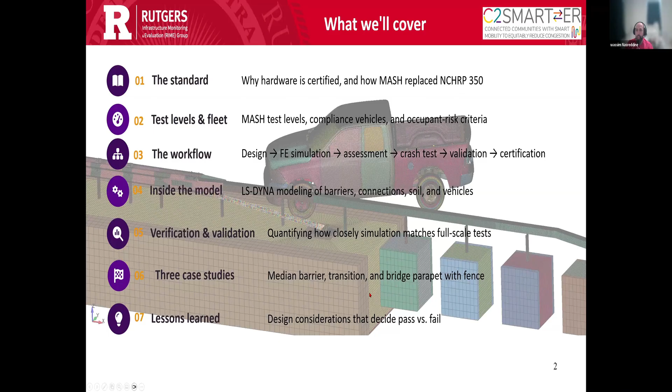Okay, so first we're going to talk about barriers, because mainly when we talk about hardware, the safety hardware we are trying to assess includes mainly the barriers. Now, of course, there are many types of barriers. We have guardrails or guide rails, as we call them. We have median barriers, bridge parapets, and transitions.

And barriers can be either concrete or steel. They can be cable barriers. There are several types of barriers. And the main role of the barrier, as everybody knows, is to contain and safely redirect an errant vehicle, of course, without excessive occupant risk, a structural breach, or debris hazard.

Full-scale crash tests are the benchmark, but of course they are expensive, and it's very hard to replicate them or do them over and over. A crash almost always lasts less than one second, but we have to understand what happens in each and every millisecond, because the damage that occurs, the snagging that might happen, the occupant risk that happens to the passengers, they all happen within those milliseconds.

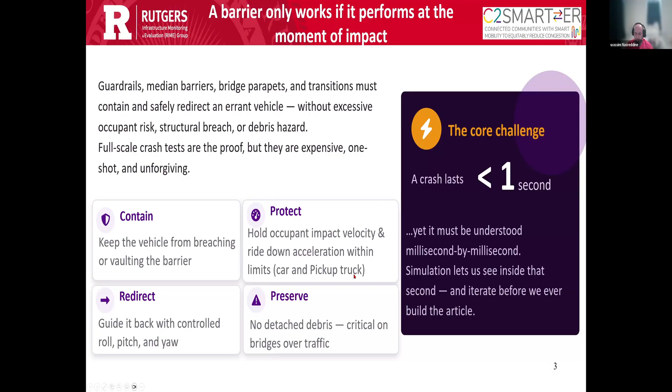So this is about the barriers that we mainly assessed in this project. We have several types. The guardrail or guide rail that you see usually on the roadside, and it's only from one side. The median barrier is what separates traffic from both sides, and it's symmetric, so whether it's impacted from the departure or approach side, it would behave the same.

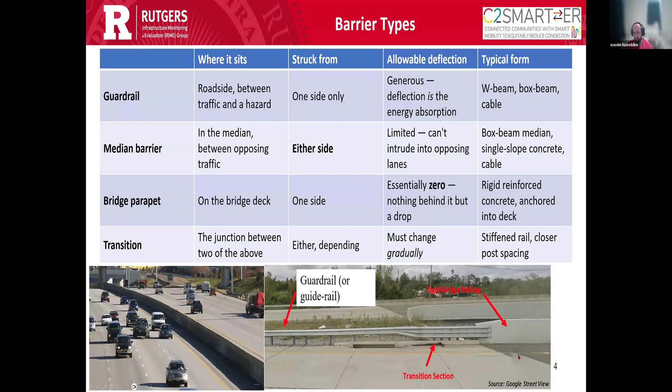We have the bridge parapet, and these are usually more rigid because we don't have margin for deformation as in a roadside barrier. And we have the transition. The transition is the junction between two barriers, usually the bridge barrier and the roadside barrier, and as its name suggests, it makes a transition in the stiffness or rigidity from a less rigid barrier, which is the guide rail, to a more rigid barrier, which is the bridge rail.

Okay, so the standards for assessing roadside barriers. Previously, it was NCHRP Report 350. That was the first standard published, and before that, every test facility had their own criteria. Since 1993, NCHRP was the benchmark for assessing the safety of roadside barriers.

Then it was replaced by MASH in 2009, where the first edition was published by AASHTO, and another edition replaced it in 2016. Now new installations, and even all existing installations, are being reassessed according to MASH criteria.

Now, what does MASH criteria look at? It looks at several things, but mainly the structural adequacy of the barrier, or any roadside hardware, but mainly we're talking here about barriers. So barriers are supposed to contain the vehicle and redirect it, and the main connections have to stay intact, anchors or splices or whatever.

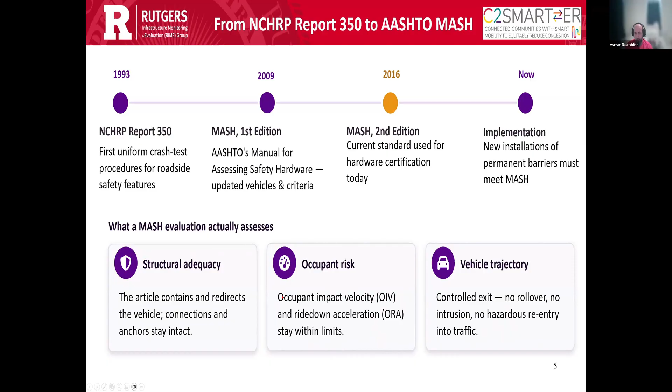Okay, so there are several test levels for barriers. As we know, barriers are not equal. There are some barriers which you see on the highway, some others on local roads, and each barrier has been assessed at a certain level. So we have test levels 1 through 6. At level 1, we have the low speed barriers, and these are the smaller barriers, and they are supposed to redirect traffic at 31 miles per hour. Test level 2, these are barriers used on local roads, and they are tested at 44 mile per hour.

Then test level 3, that's the most common, used for highways, where the barrier is assessed based on an impact at 62 miles per hour with a car and a pickup truck. Test level 4 adds, to test level 3, a 10-ton, or 22,000 pound, single unit truck at 56 mile per hour. Then we have test levels 5 and 6, which add a tractor trailer and a tanker trailer.

Now the small passenger car, otherwise referred to as 1100C -- that's its weight in kilograms, so 1100 kilograms -- and this is its weight in pounds. The impact is optimized to be at a 25 degree angle. For the pickup truck, which weighs around 5,000 pounds, also at 25 degrees with the same speed.

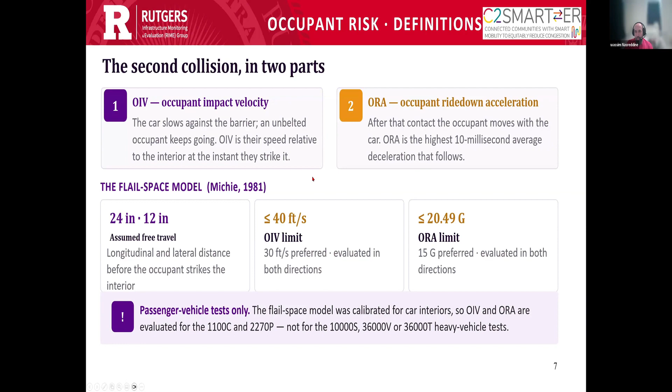Another component that we look at is the occupant compartment deformation. So aside from the velocity and the acceleration during and after impact, we look at the deformation of some components of the car.

Mainly, we have the floor pan, the door, the top part, the toe pan, the roof, the windshield, everything. But almost always the governing compartment would be the floor pan and the door because of their close proximity to the wheel.

So why is this dangerous? Because any excessive deformation would result in injuring the passenger or even the driver, depending on the side of the impact. And there are limits set based on the compartment. The floor pan's limit is 12 inches. The door limit is 9 inches. And if the occupant compartment deformation exceeds that, that would be considered a failure.

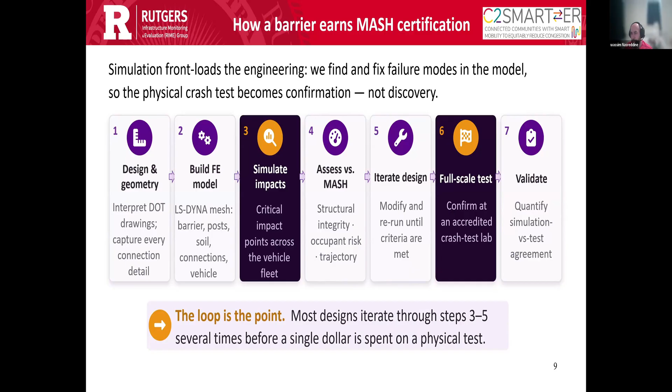And then after everything is prepared, we go and do the full scale test, and then we go back to our model and see how it compares to the full scale test.

As I mentioned, we use LS-DYNA to do the simulation, and LS-DYNA does the equations of motion with explicit central difference time integration, which is the right tool for a short contact-rich event. We have large deformations, buckling and fracture, and thousands of interactions. All the parts interact together, and they mostly undergo nonlinear deformations and reach their nonlinear zone.

We do that for a full test that lasts for 1 second, the whole impact. Because we're doing explicit time integration, we have to do it at very small time steps, because otherwise we would risk the instability of the model, and then it stops. For our case, it's 5 microseconds of time step, so we will be looking at the whole model every 5 microseconds.

So for a full test, we have 200,000 steps, and at every step, the software undergoes a whole lot of mathematical computations, because as mentioned we have millions of elements. They're mostly nonlinear and contact driven.

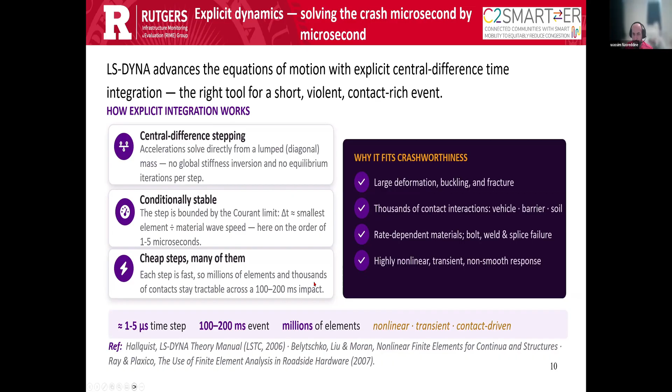To be able to run these huge models, we use our cluster at Rutgers, which is a series of very high-end computers. We do distributed memory, where we can run up to 280 CPUs for every case, and if we go up to 280, we can finish the model in 1 day. Otherwise, if you use less than that, it can go up to 4 days just for one case.

And remember how many cases we have, how many impact points, how many test vehicles we have to use. So it requires a lot of time.

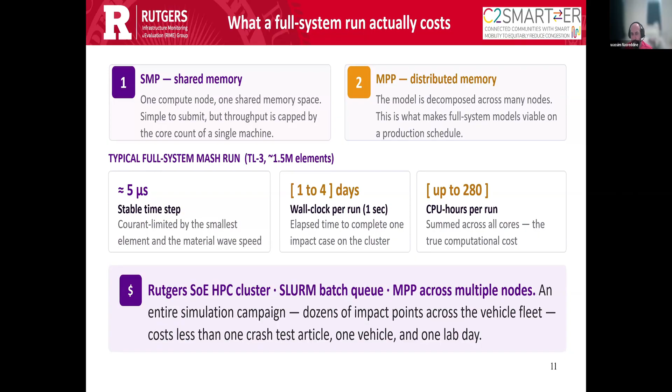As for the modeling, every structural component is modeled and meshed appropriately, so if we use a very small mesh, we increase the runtime, and if we use a larger mesh, then we have to reduce the time step, so that doesn't help us. So all of that is optimized.

Of course, concrete elements are modeled as solid elements, so are bolts as beam elements, but the heads and the nuts and all of that are also solid elements. Soil elements are solid elements. Rails and posts, steel rails, are modeled as shell elements with 5 integration points to capture the deformation. And all of these elements were calibrated and tested by different facilities.

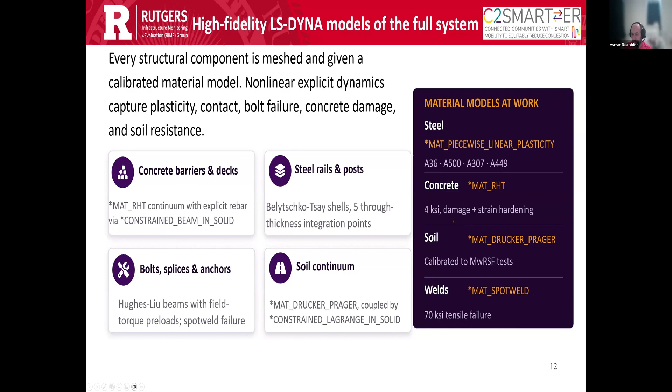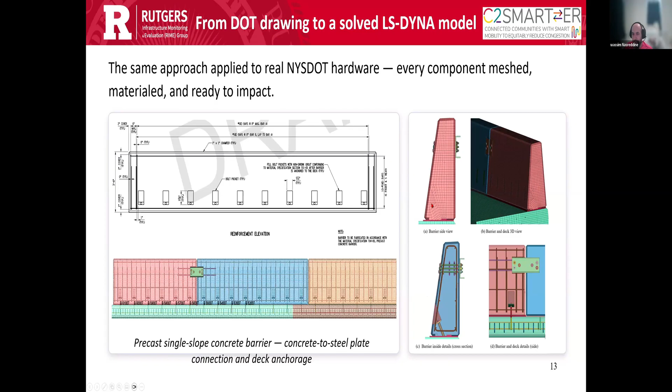So we have the barriers connected. You can see the mesh here for the concrete barrier, and we have a steel anchor going through the deck, and we have the deck reinforcement and the barrier reinforcement here, and a connection plate. So there are a lot of details to pay attention to.

And this is another article that was also tested a month before that included a concrete parapet with a fence, and the fence required a lot of elements to capture. Now that's something we spent a lot of time to optimize because we had almost a million beam elements for the fence, and you can tell how many contact interactions are there.

So that also required we had to reduce the time step because we got some non-physical added mass, and that resulted in termination of the model. So sometimes we have to fine tune it to work the best.

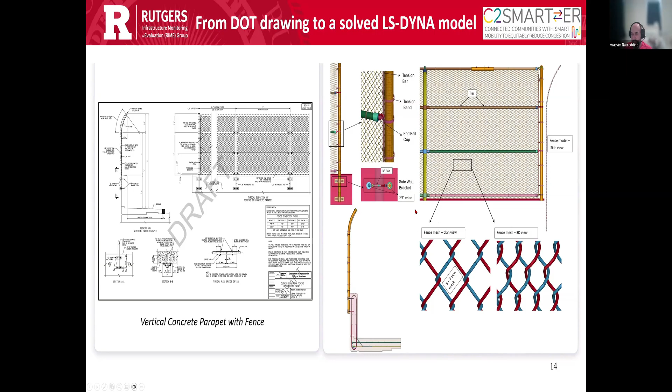Okay, so we talked about the hardware that we mainly do, but we didn't talk about the vehicles. Of course, the vehicle is much more complicated to model because there are many components like the suspension, the wheels, the pressure, so there are a lot of details.

So that is something that is done by other test labs. Mainly George Mason University in Virginia does that, where they acquire a vehicle and tear it down. They scan each and every part, digitize the geometry, test the components, mesh the elements, characterize the materials, and then validate it. They validate it by crash testing the whole vehicle, and then the finite element model is published.

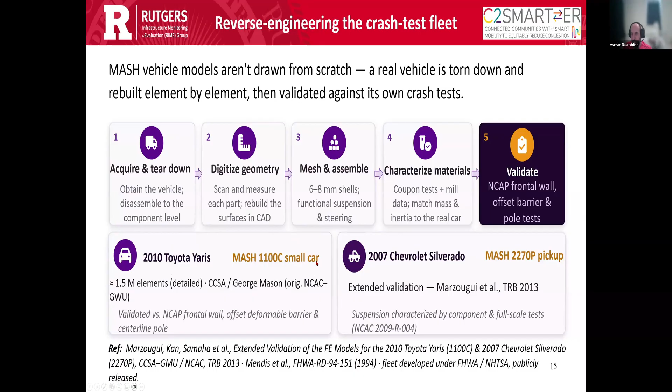Now, these projects are usually federally funded, so you can go to the George Mason University website and download the vehicles. The vehicles have almost a million elements depending on the vehicle. Larger vehicles have less elements because they are bigger, and you can find the finite element model in LS Prepost for the car, the pickup truck, and the single unit truck, in addition to the bigger vehicles as well. So these are the different vehicles that you can get from there.

Now, they try to not increase the number of elements, which actually they might need to increase more, but they try to keep it this much only to reduce the time of running the model. So if you look at Tesla, for example, they have north of several million elements, but they have more computational power available than the public. So they try to keep it less than 1 million.

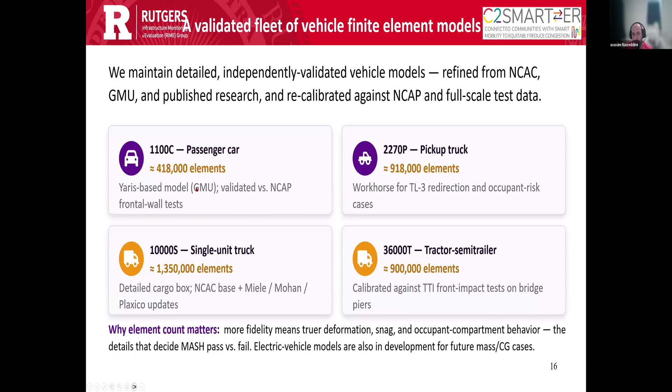Okay, so as mentioned before, the way we do it is we have to assess the structural adequacy, the occupant risk, including the OIV, ORA, and occupant compartment. We have to check for any snagging or pocketing, and that mainly happens when the rim or the door is captured by any gaps that are inside the barrier, which could increase the deceleration if the car was caught in any gap. And we have to look for any energy and debris.

That's mainly a determinant of failure over bridges. So if we have a certain barrier and if we have components falling from the top, that would be a failure despite having everything else within the limits.

Okay, so this is a verification and validation of the soil model. We use Drucker-Prager for the soil and LS Prepost for those who are familiar, of course, with solid elements. But we have to change the parameters so they comply with the soil at the testing facility or the test site. That's an example of something that was done by Midwest Roadside Safety Facility, and we have good correlation between the FEA and the test, as you can see.

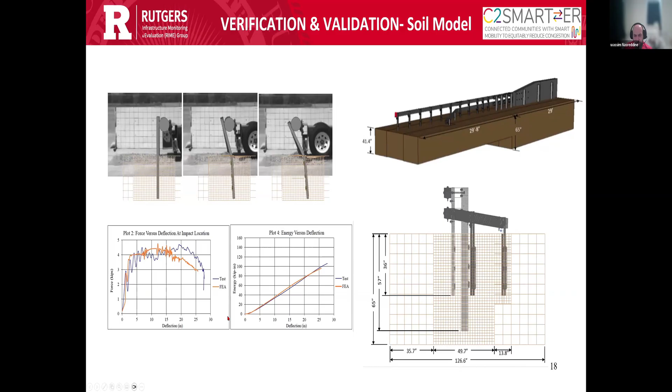And this is another validation, for the fence, and that required a lot of effort because when the fence is built, there's a little bit of slack between the knuckles, so we had to slightly optimize that gap so that we could have good agreement between the model and the test. This was done by TTI. This model was done by our partner Chuck Plaxico at Roadsafe LLC, and you can see this is the comparison between the test and the model.

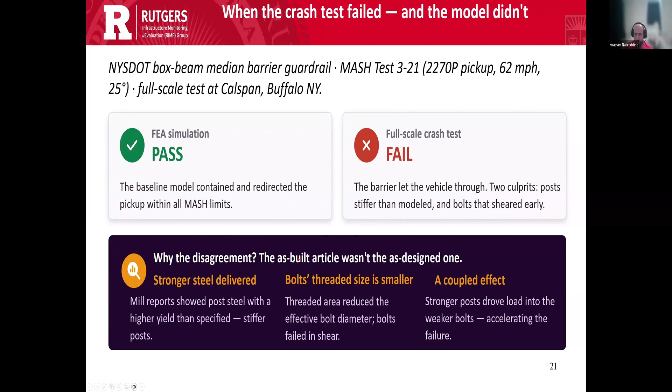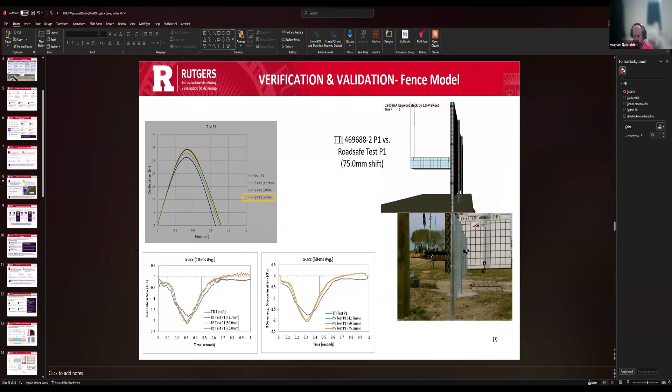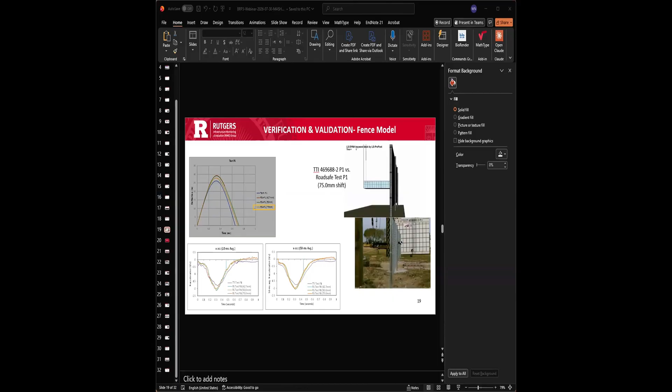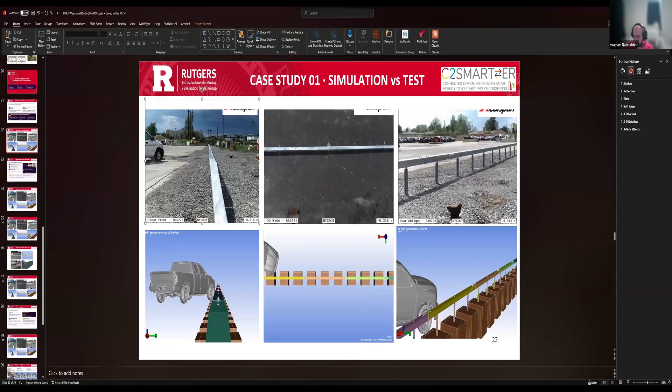Sorry about that, for some reason the video is not... let me try to open another one. Just one second. I believe when I tried to change the format, I might have copied it as an image instead of the video itself, that might be the problem, so we're sorry about that. I just need 30 seconds to get the videos because they're interesting to show. I think you may need to change or share the other screen maybe. No, I'm just going to copy paste it in here. Where are we? Okay, so this is the one, and this is the one, and this is the one. All right, so I'll share again. Let me share again. No, you're sharing your screen. Yeah, that was good.

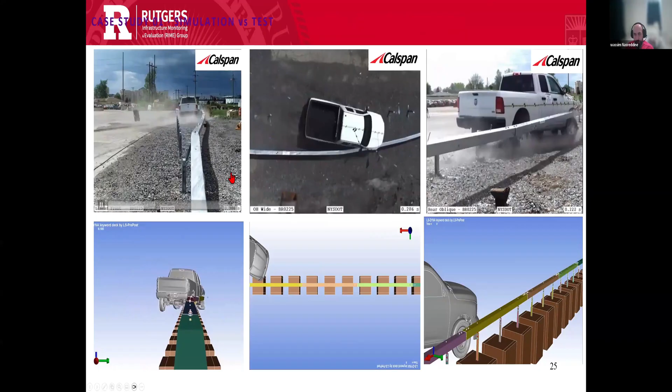Above you can see the crash test, and down you can see the simulation.

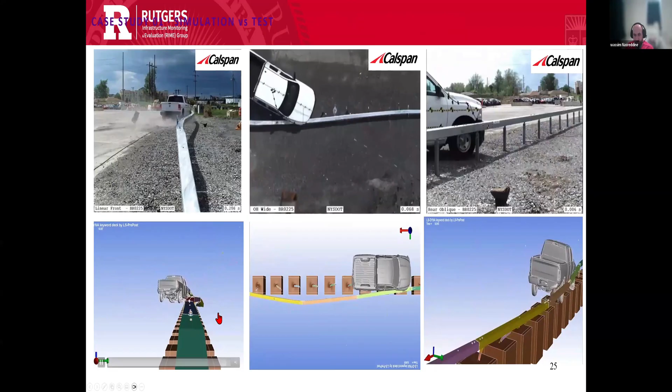So the main distinction was that the median barrier fell off, and that's considered a failure. It's not supposed to do that. But in the simulation, it was okay. It did not fail completely, just some expected deformation. So that was the previous simulation that we had. And this was the crash test, and that was a failure.

So we looked into why did that happen, and we could identify two things. First, the bolts that are holding here failed prematurely, and you can see that these posts stood straight. Surprisingly, they stood straight. So the weak point was definitely the bolt.

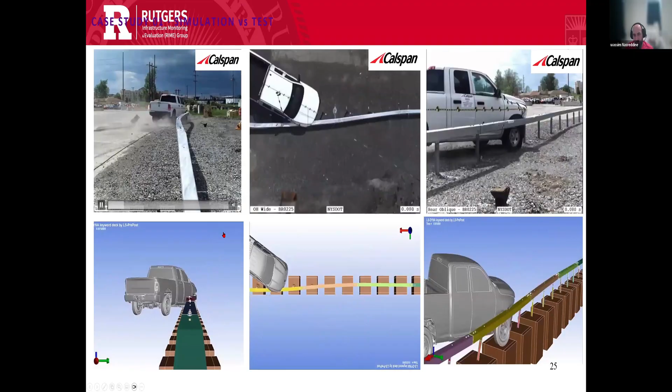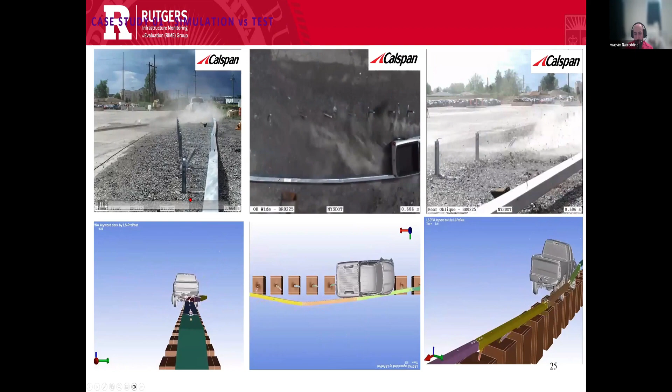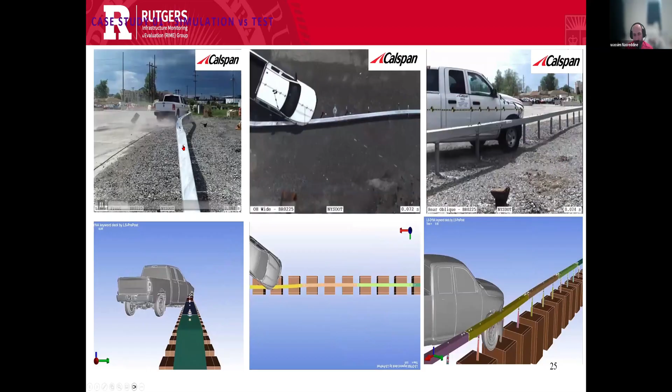Now, when we looked at the mill certifications, the material properties of the components of the test, we found that there was a big difference between what we used and what was supplied by the contractor. And surprisingly, what we got was very strong posts and weaker bolts. So since we have strong posts, all the forces were transmitted to the weaker bolts, and the bolts sheared off very easily, and we had that failure. So we had to change this in our model.

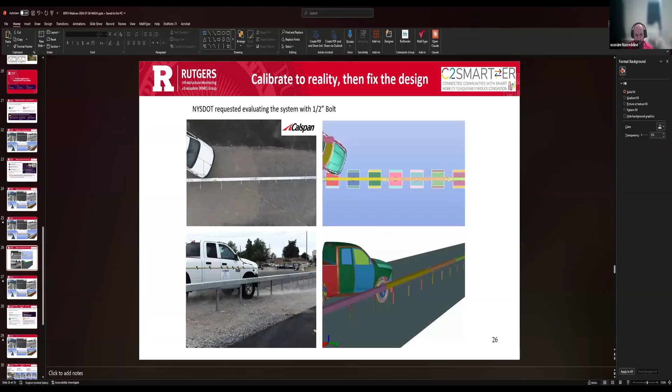And here's what we got. Simulation. So now we have the modified simulation, and you can see. This is the same test, and this is the modified simulation. And you can see that we were able to get that failure by merely modifying the bolt properties and the post properties. So you can see different, let me play it again.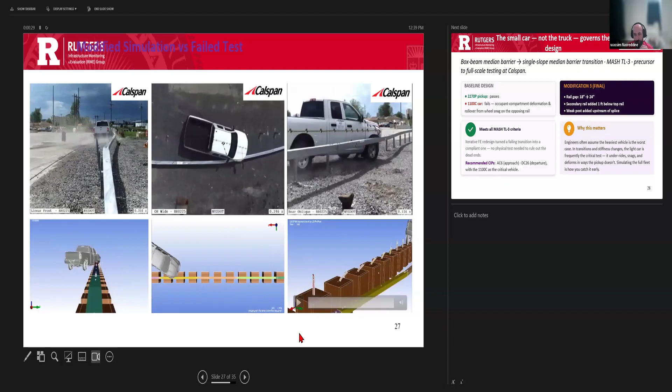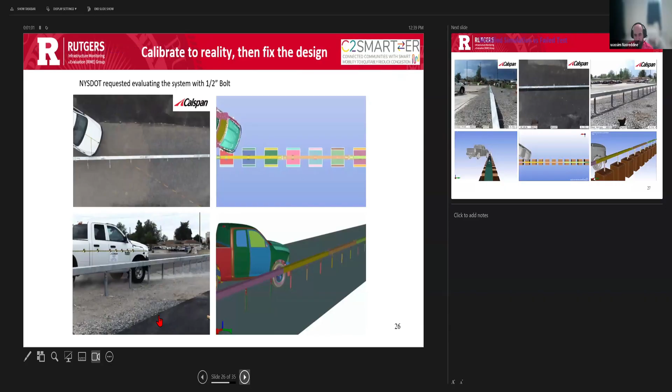Wassim, I think you are not sharing the correct screen. You are, I see the same video that you showed earlier. So the one that I showed earlier was the one that did not fail here, but this one failed here. Do you see the distinction? So this was what I showed previously. We had the barrier hold tight. So the top three are the same, but the bottom three are not the same. You can see that we had a full failure here of the barrier. Do you see that? Oh yeah. Okay, sorry for that.

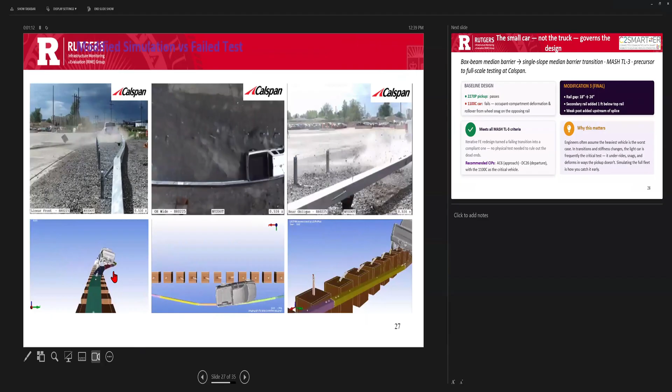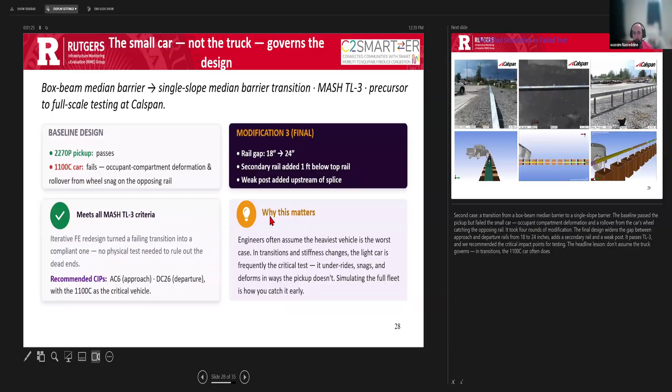So that's only by modifying the properties of the bolts and the posts, we were able to find it. Okay. Yeah, all right. So.

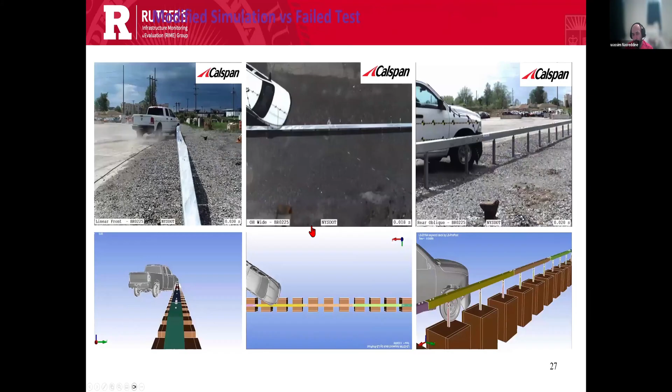Let me go a little bit faster because we spent some time just to get the videos. So we proposed a certain modification which was only increasing the bolt size. That was an easy modification. We also ran the same test, and we had it work for both the finite element and the actual test.

Now another case study that we had, a box beam median barrier, and we had to do the TL3 criteria, and for TL3 criteria we're supposed to do both the car and the pickup. And what we did, we ran the pickup truck, and everyone assumed, okay, so if you have to do TL3, just do the truck and let's see what happens. The truck passed everything. The article was all right for the truck. Everything was below the limits. However, we said let's do the car.

And surprisingly, the car failed several times. So the first time, the car failed in occupant compartment. You can see how much the compartment moved here. So it exceeded the limits. Then we did a certain modification. We added a rail, and then there was plowing into the soil, and that resulted in a complete overturning in the car. And that happened from both sides.

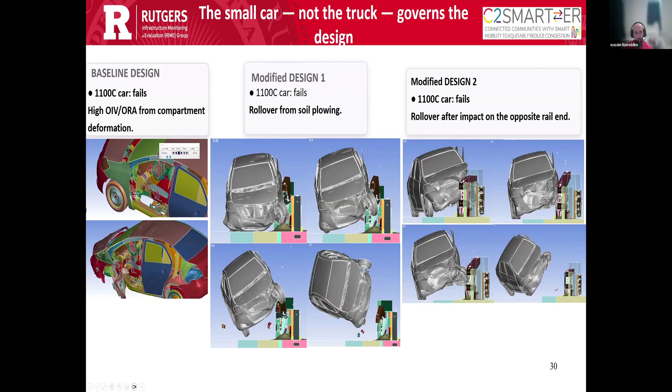So we had to do several modifications, and that's all before the crash test. So we were able to propose several modifications before the test. And it's worth noting that these are trial articles. None of them are yet implemented, and that's why New York State is doing all of this assessment before implementing them.

And another one was selecting the CIP for the barrier with a fence, and we had to run several cases. And mainly, we were looking at any components falling, because usually when we have a fence, that means the bridge would be for a bridge over traffic, and we don't want any poles or rails falling from the top due to the impact.

And we had to run several tests on this, and we were able to reduce, and sometimes Ali can talk more about that if needed. We have to make some judgment, because in the finite element we could model a bigger article, but when it comes to the crash test, it's not all needed. So we could modify or shrink it just to make it less costly, because there are some components that do not contribute to the behavior of the article.

I'd like to share the lessons we learned. Often connections do govern, despite being small—bolts, splices, anchors, especially if there are any gaps between the splice and the rail. Sometimes they govern due to snagging or failure. So these should not be overlooked.

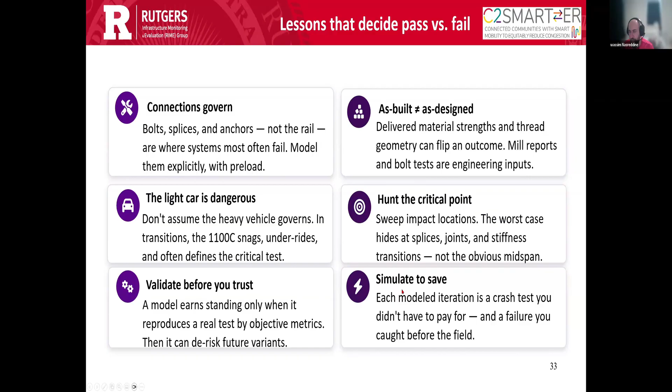And if that does not fail, then we have a higher likelihood that we will pass the crash test. It's mostly about knowledge and saving. It tells us that we are validating our design, done using design standards, before the complete validation and perhaps certification through the crash test.

So, concluding now: we want to de-risk the test, cut cost and time, and ultimately have safer roads. I'd like to acknowledge C2SMART, New York State DOT, Calspan, and RoadSafe for their partnership on this project, and thank you for your attendance. I'm happy to take any questions.

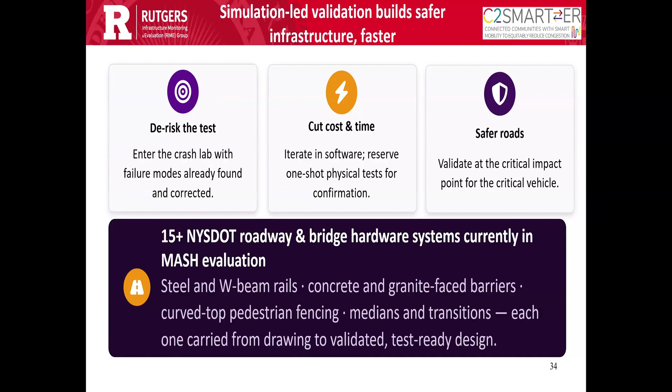Okay, thank you Wassim. Let's look in the chat for questions. There's one on the Q&A from Samar Rabi from NCHRP: what was required to get the NCHRP balustrade Pulaski Skyway bridge parapet eligible for TL4 by Federal Highway? What modification would be needed for TL5 consideration—is it just the height, or are there other factors? Maybe Ali, you can answer the testing requirement difference between TL4 and TL5.

However, there was a little bit of discussion at that point. By the way, it passed for TL4, and the design performed extremely well. So we were thinking, as the question asks, maybe this could be TL5 given that it's kind of historic. A lot of counties have asked me personally and DOT to use it, and it's been implemented in California and other states, including counties in New Jersey, where they implemented this historic type of balustrade.

To implement it to TL5, I believe it might need to be a little bit higher than it is right now—I think it's at 42 inches. It might need to be 44, just to make sure that the larger vehicles, whose chassis are now 48 inches above ground, don't roll over or slide over it. That could be a factor requiring it to be higher.

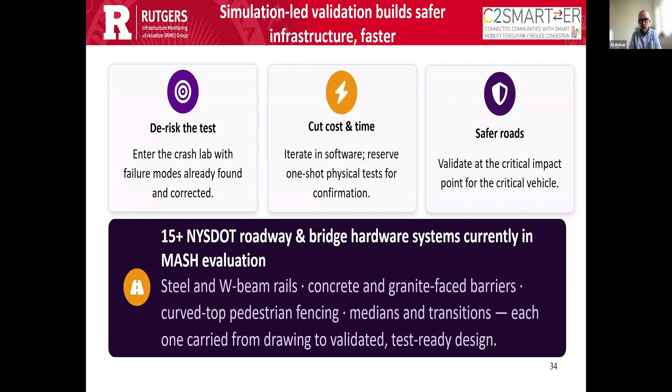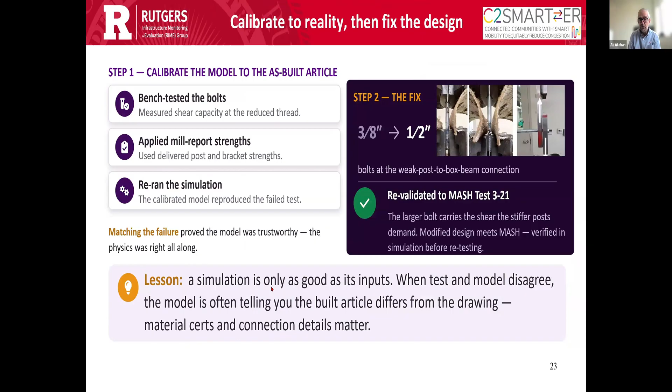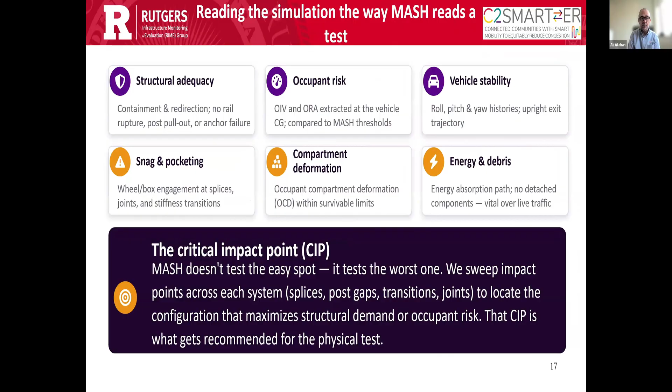Of course, thank you for the explanation. Well, MASH test level 4 requires 3 tests: a car, 1100C, as Wassim mentioned, a 2270P pickup truck, and in addition a box truck test, called 4-12. So those 3 tests—when the test article passes successfully per MASH criteria—it is TL4 compliant.

When it goes to TL5, it becomes the third heavy vehicle, changing to 36,000 kilograms. So it's a much larger tractor trailer, which requires a much bigger kinetic energy impact on the test article. Assuming the system on the bridge, roadside, or median is strong enough, that test requires a much stronger and stiffer system to pass for a TL5. So the difference between TL4 and TL5 in summary is the kinetic energy of the heavy truck. Other than that, the 1100C and 2270P tests remain the same, and the third test is a much higher demanding test. That's the difference between them.

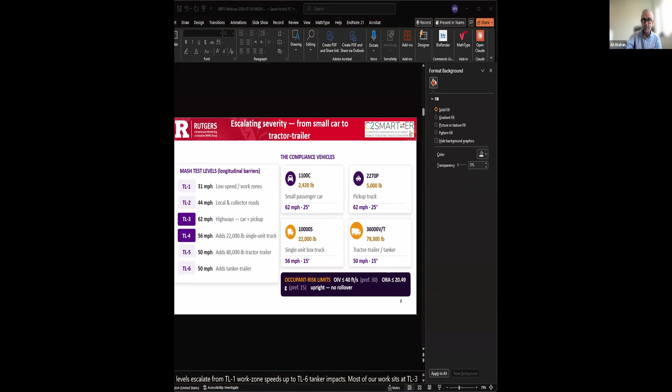Thank you, Ali. Of course. Thank you. Any other questions? Yeah, I don't see any additional question in the Q&A.

Okay, another question, Samer Rabi again from DOT: Since EVs are heavier than standard cars, will that change design standards, testing requirements, and weight in the future?

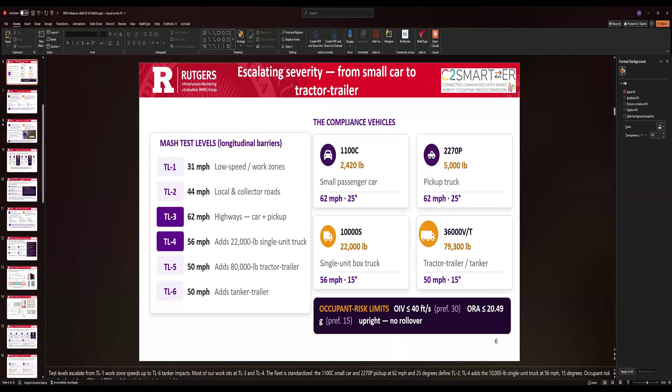Yeah, I think I can. Wassim, you want to take that? There's currently a bit of thought on trying to perform more testing and more modeling. Calspan has done at least one testing, my understanding, and New York State DOT is interested in pursuing more work in this area. Definitely the electric vehicle, as Samer rightly mentioned, they are heavier, plus their design is slightly different, so the road safety hardware, especially the beam and the post, might need to be re-examined in light of that.

Ali, you want to talk a little bit about what you have done? Sure, I think you did a couple of tests on that. Sure, so as Wassim and Dr. Nassif mentioned...

MASH testing for a TL3 system requires two tests, 1100 and 2270P. All current roadside safety designs are tested with standard vehicles, 1100 kilo and 2270 kilo pickups. Now that electric vehicles are becoming prevalent and spreading in the country, those type of impacts are much higher, 30%, 40%, 50%, depending upon the weight of the electric vehicle versus the car and pickup. It's more impact energy on the existing hardware, and recent crash tests on the W-beam and thrie-beam systems show those systems need some kind of strengthening.

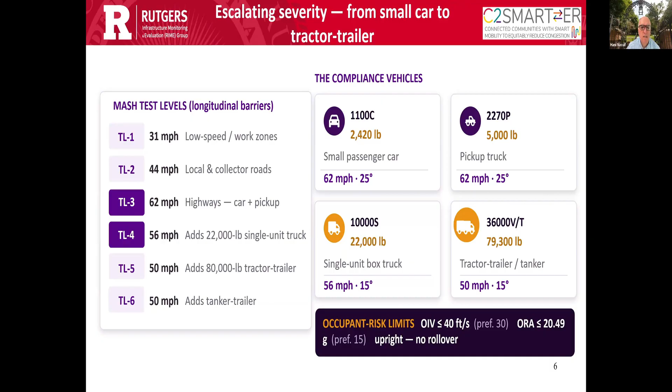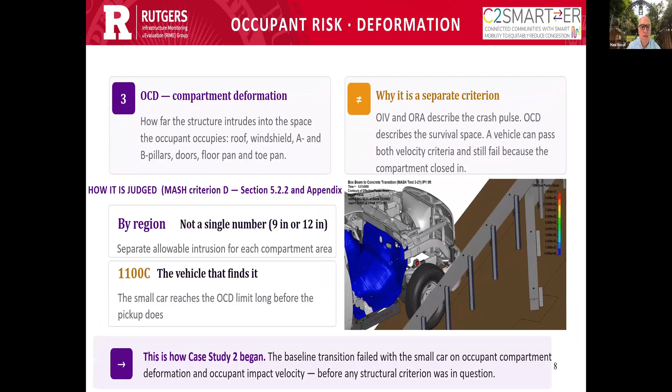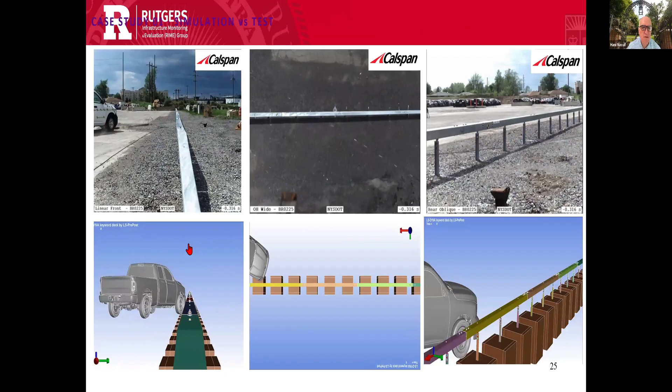Okay, I think we're coming close to the time. You want to play the video again? I know you had a hard time with some of the videos. I don't know if you want to share, just while we have time. Yeah, okay, that was a glitch on our side. When I checked it, it was working, I don't know what happened. So until the videos are right, let me comment.

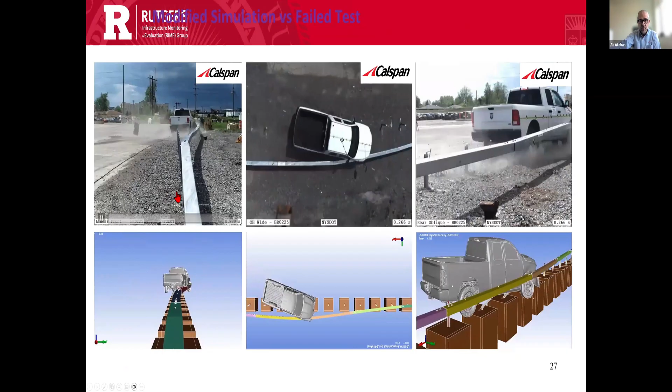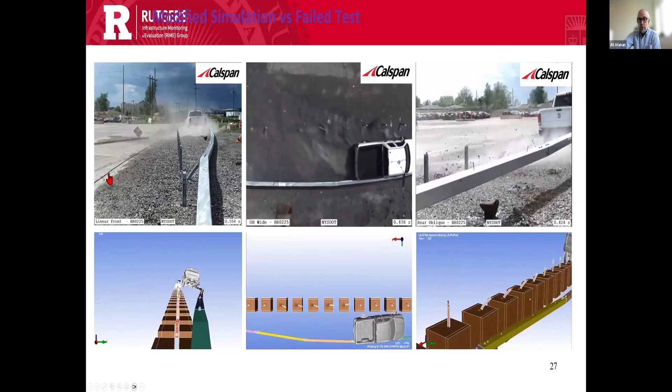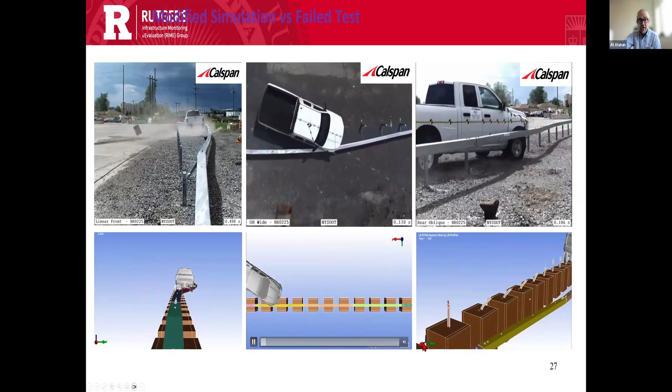With the help of Rutgers and the team, it makes our life easier as Calspan because we have the worst case scenarios identified every time. So we save a lot of time, effort, and cost on these tests since everything is prepared for us, and we run a test with the data provided by the Rutgers team. Thank you for that.

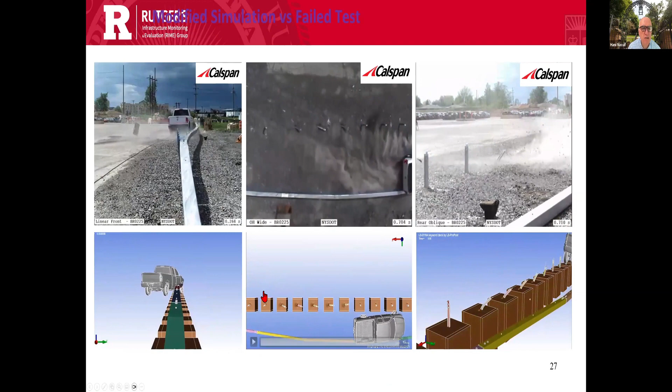Yeah, so which video are you showing? That's the modified simulation. It's kind of small, can you enlarge it, make it a little bit bigger maybe?

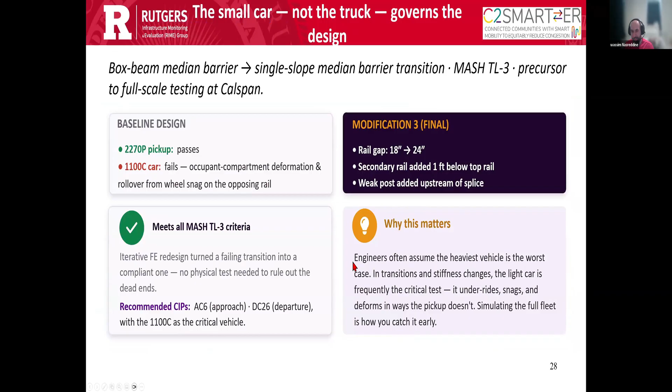Because there are 6 videos, they had to be smaller. This only shows how a small modification in material properties would change the result entirely, from pass to fail.

It's just the posts, and a 20% increase perhaps, and that's counterintuitive actually, to have stronger posts lead to failure of the whole article. You wouldn't mind if you requested 50 KSI posts and got 70 KSI posts, right? But that led to the failure of the system.

Why? Because now this is a strong point, we have a weak point, which is the bolts. So if we have stronger posts, then we require stronger bolts just to balance. That was a great lesson that we learned.